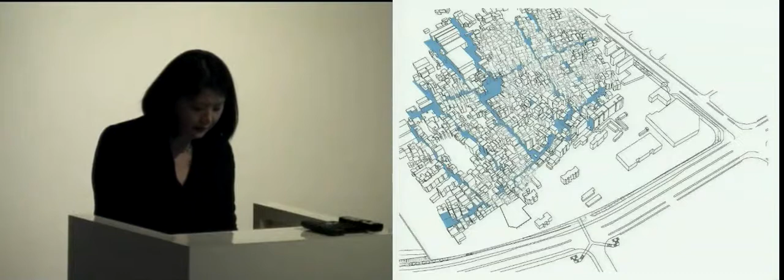Part of the reason the government is very anxious to find a solution is to restore a certain historical significance to the site, and to remind people that Shenzhen actually has a very rich history. Now that the city has moved past industrialization and urbanization, it's moving into post-industrialization, trying to brand itself as a green city, a cultural city, a city with significant culture and heritage.

So this place, forgotten essentially during all 30 years of Shenzhen's official urbanization, is suddenly remembered, with people saying, okay, let's try to do something—let's renovate this so we can show people how long a history Shenzhen has. But the difficulty is that only 7 buildings remain that have any historical value.

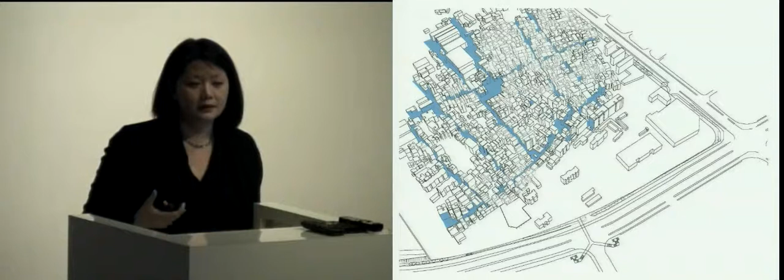What are the rest of the buildings? As you can see, it's very mixed—different heights and different ages. Essentially, this place has become an urban village. All of the buildings that were demolished were rebuilt by local residents into these concrete bunkers, concrete buildings built to house migrant renters who come in looking for housing.

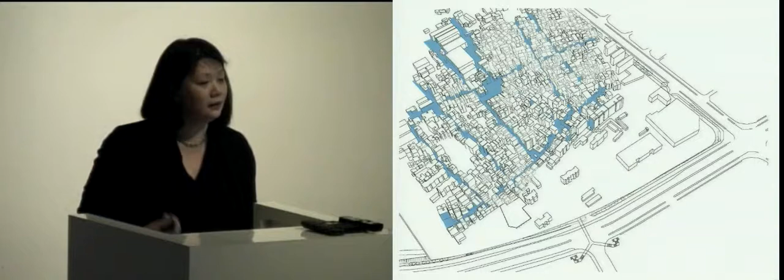As is very typical of all urban villages, it has a very vibrant street life. These are the different commercial, cultural, and everyday life activities that happen in the streets—to me, quite precious and quite rare in any Chinese city today.

This is an analysis of the three main streets of this neighborhood, with a cataloging of all the programs along the street. The image is probably too small to read, but every line represents a different shop with a different program—so you'd have an animal hospital next to a grocery store, next to a cell phone seller, next to a noodle shop, for example. An incredible mix of different programs and storefronts.

It's quite faint, isn't it?

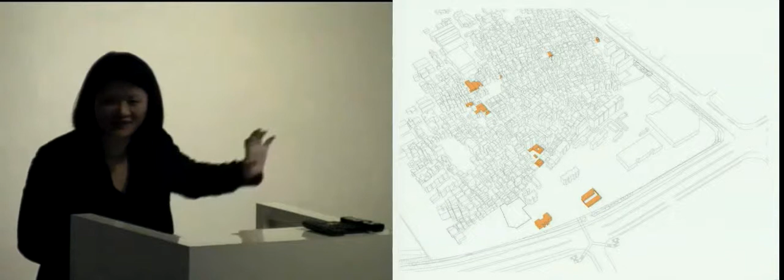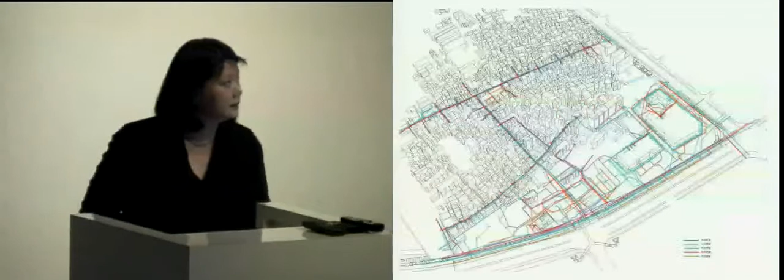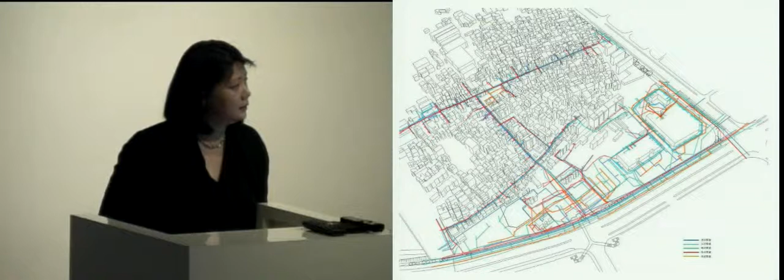This is a mapping of the available civic infrastructure. You see the land outside of the historic city is very well connected, and there's not much there. But inside, the infrastructure only goes as far as the few main streets, and these areas are left on their own to make their own water supplies and drainage. So this area has a lot of infrastructural problems, a shortage of water, frequent blackouts, frequent flooding during heavy rain. So one of our main goals when we took on the competition is to upgrade the urban space and street space for the residents to really improve their daily life.

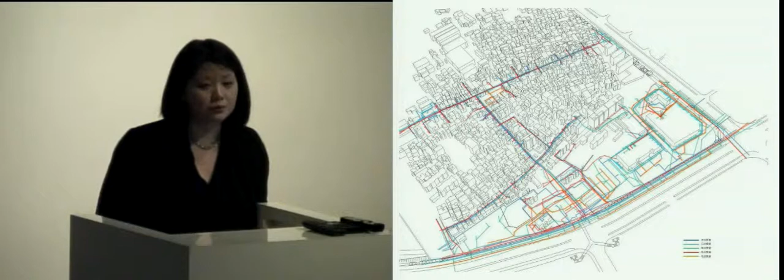So what we outlined was 5 major urban design strategies. The first was specified in the design brief as the main objective: to renovate significant public spaces. We said, fine, we do that. But we also wanted to upgrade the street space, preserve the historical monuments into something of use, and conserve the historical residential buildings. Lastly, and most important for us, we wanted to improve the basic public infrastructure with sustainable environmental technologies.

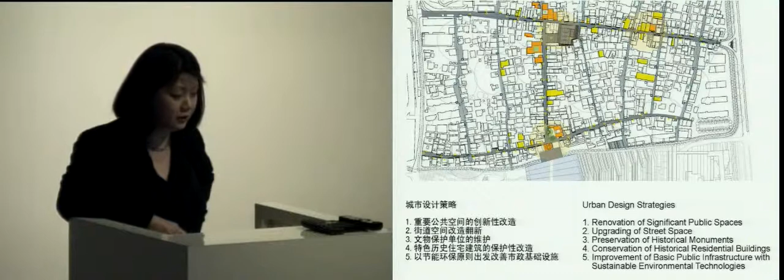So what we developed is an implementable urban street section. The text is quite small, so maybe you can't see it - can you see it? Okay, good.

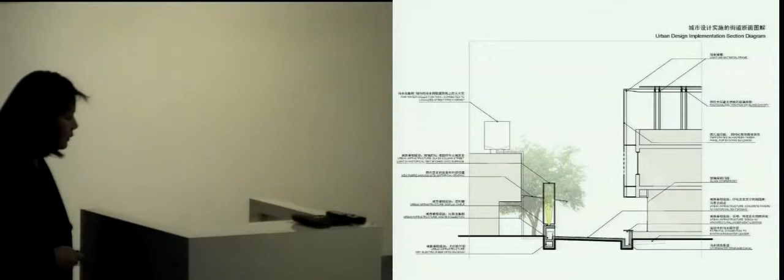It ranges from installing water tanks on the roof for rainwater collection, as a water reserve for the building, but also connecting to periodically installed urban infrastructure that will house sanitation and new street lighting. After dark, the whole space is completely dark because they don't even have enough electricity to light the residential buildings. These water tanks are also designed to connect to localized fire hydrants.

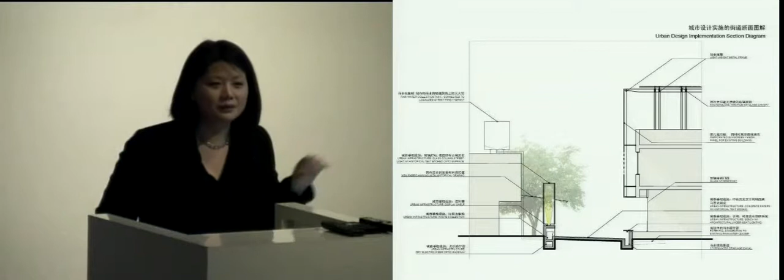One of the biggest problems the government sees with the urban village is that it's a fire hazard, because the streets are too narrow for normal fire trucks to get into them. So we wanted to put these sporadically, equally spaced throughout the neighborhood, so it can give time for an alternative approach and delay the time necessary for fire teams to get to the site.

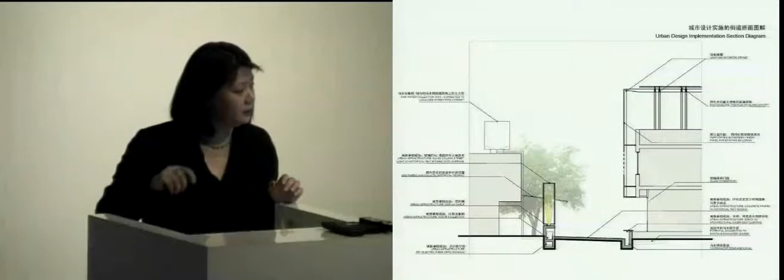We're also proposing to regrade all of the streets with new drainage channels to collect rainwater for other use, to really prevent current flooding. We're also proposing new ducts for water, electricity, telecommunications and such, so it can really meet the extreme high demand of this area.

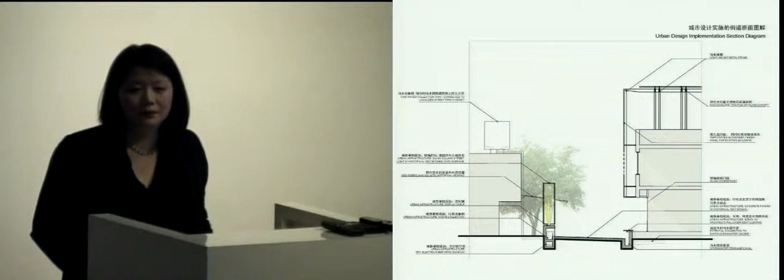About 12,000 people actually live in the neighborhood, but the infrastructure that's there is only meant to house a few hundred people. That's why there's this huge discrepancy in between.

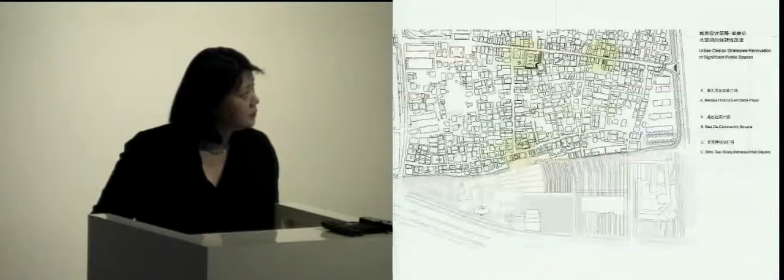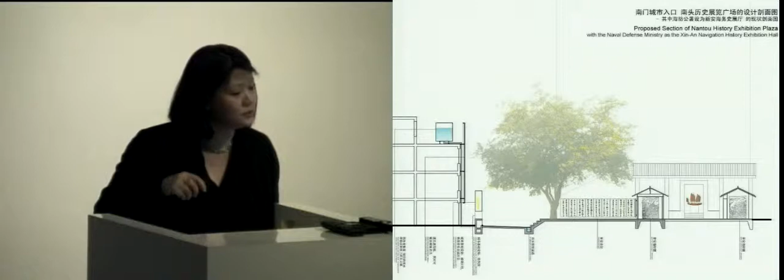So we chose 3 intersections as the 3 public spaces for more detailed renovation. This is at the entrance of the gate, so the monument, one of the monumental museums, becomes an entrance museum gallery to house visiting information for the visitors, whereas the rest of the renovation goes to improving the existing residential buildings.

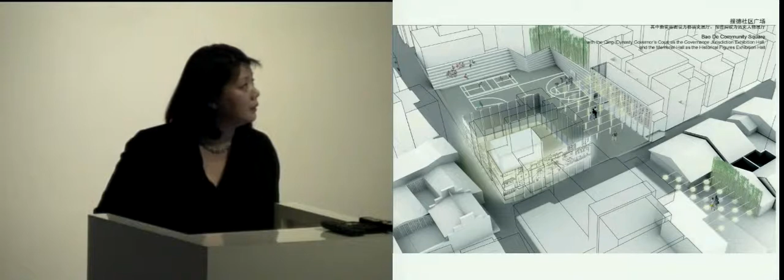Again, this is another historic monument. It's proposed to be used, and for the urban space to continuously open into them, to connect the city, essentially the city's current modern life with the historical past.

The second component of this competition was to design an urban cultural park. They want an urban cultural park right outside of the historic city to be able to provide public amenities both to the citizens inside and to the city in general.

And the government gave an insinuation of what they wanted. They really wanted to have these pagodas scattered throughout the landscape, because to them that is what would be historical. But because this was always a secular place of governance, there was never any pagodas in all of its nearly 2,000-year history. So we said, rather than fake history, we really should look into the real cultural heritage of the place.

And one thing we discovered that's really interesting is that this region, before it was Hong Kong, Shenzhen, etc., this whole area was called Xin'an. During the Qing dynasty, this area was very famous, known throughout China, from Beijing to Hunan, etc., for its beautiful natural scenery, so that poets, artists, and literary people would travel for months from northern China to visit its local landscapes and sceneries.

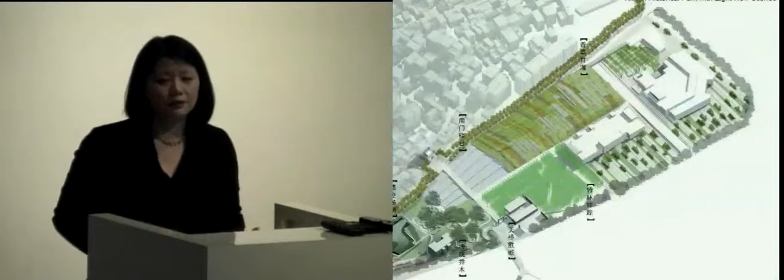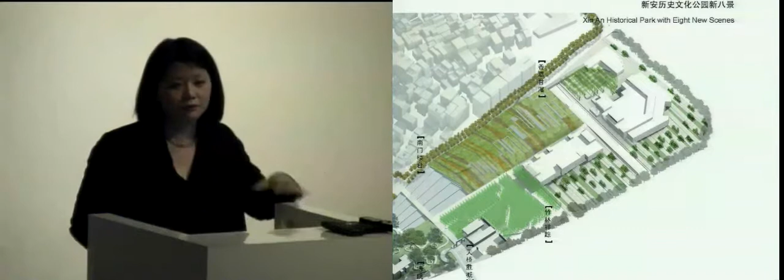And what we thought was an opportunity is that in this space we could recreate, not necessarily a fake past or fake imagery, but create modern landscapes using the vegetation and the poetic essence of these scenes for modern day use at this location. So the first scene that we have designed is actually a pathway, a walkway, because the historic first scene was named after this wutong tree, this really beautiful, tall species of tree that was very special to the region.

A lot of the scenes were of vegetation and landscape that's only locally available, and it's this landscape and vegetation that gave the cultural meaning of the place.

What we discovered is that even though the city wall was demolished several hundred years ago, you still see a trace of it, because all Chinese city walls are built on rammed earth, and it's very difficult for vegetation to grow there. So even in locations where dense forest has overtaken the city, it left this trace of the city wall that was once there.

So what we propose is that the first scene is actually a planted walkway all around the historic city. Essentially, you will be walking on top of what once was the city wall. This is an example of how we wanted to make a composite of something useful to modern day life that still evokes a sense of the history of the place, both spatially and culturally.

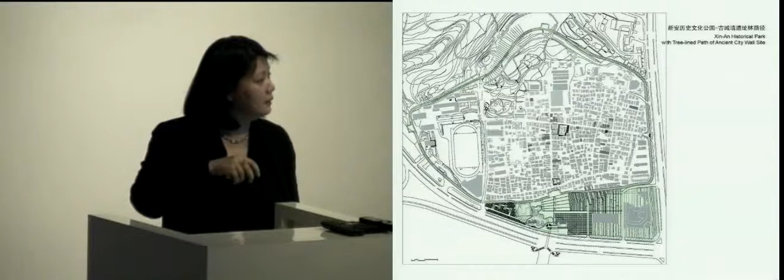This is the first scene. We tried to really use the original names and poetry associated with the original scene to design the modern landscape. The original title for scene 1 was Parasol-Treed Mountain with Heavenly Pond. The idea is to create tall vegetation with local trees that form parasols and shade you from the light and extreme heat of the region.

Second scene was called Peach Plum in Low Mountain. We used locally well-known peach plum trees to create what are now tennis courts and badminton courts throughout.

We're running short on time, so I'll just show you the scenes quickly. Essentially, each one is composed of modern-day use as a park space while utilizing indigenous vegetation that creates a sense of the past.

This is created as a kind of water landscape, so that when you go from the modern city before entering the ancient city, you go through a ceremonial walk. This water pond is also used as a retention pond for rainwater collected throughout the city, so that it's programmatically, spatially, and culturally all linked together as layers of space.

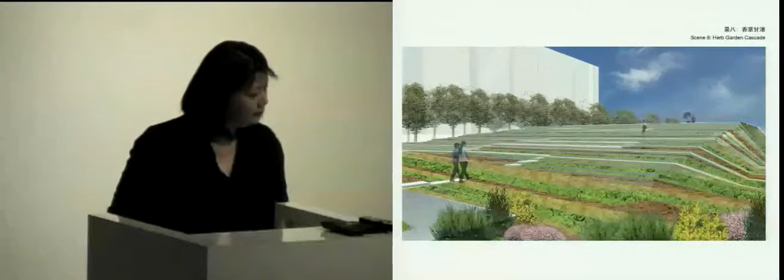There was a major parking garage structure, and what we did is create an herb cascade that would cover the parking structure, because the final scene of this region was really about the locally grown herbs that were so fragrant they traveled for miles. So it's about sensorial perception along with programmatic ideas.

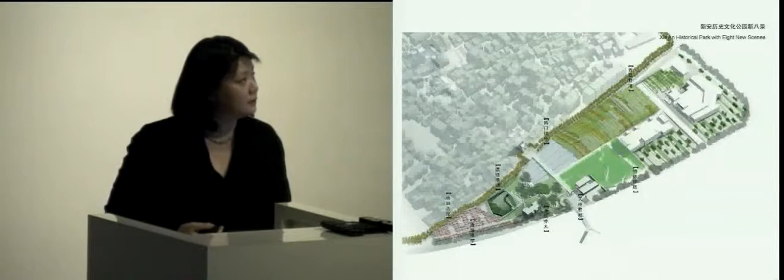In this case, zoning in the park is really by color of vegetation and by different types of vegetation, going from water and wetland spaces to bamboo groves to herb gardens, etc. That's what creates the spatial sequence throughout the zone, which is fully loaded with the required program for the park space.

The different zones created in the park are extensions from the streets inside the historic park, trying to create a linkage and a continuum.

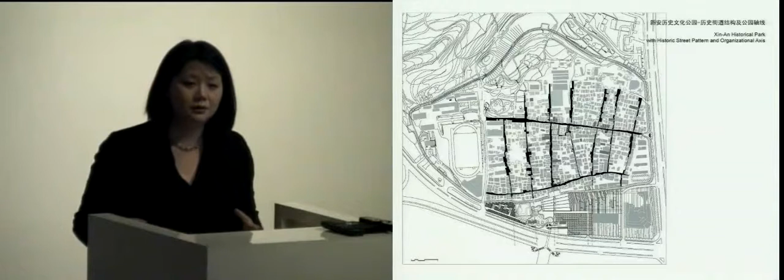The research into the urban villages was really inspiring in understanding that the best way for the city to continue to be - not to use the word sustainable growth, but really responsible and rooted in ideas and culture and the way we live - is to try to understand history as a continuum, where there's equal value to what is happening today as there is to the past.

When we looked further into the history of the place, this area by the Qing Dynasty had the nickname Nine Streets. What's interesting is that even though only a handful of historic buildings remain, the Nine Street pattern still remained from the Qing Dynasty, when the street was already formed.

So we tried to carefully preserve the spatial infrastructure of the street space that was there, and we used this to argue to the government that it's really not about the buildings per se, it's really about the urban life and the urban space that continues the urban life.

So we were able to convince the international jury panel of the argument of trying to use contemporary means to lightly preserve, evoke, and improve the quality of life in this place, along with the UK-based architecture office. The two of us were selected by the international jury to be winners of the competition, and we were submitted to the government. The government was supposed to choose one of us to continue with the commission.